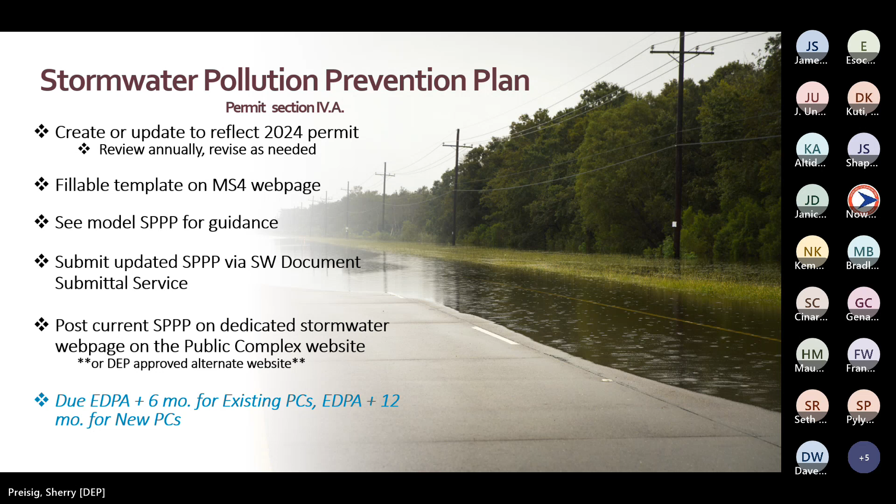Okay. Next up is public involvement and participation, including public notice. Now, this is something that all permittees have been required to do from the beginning of the MS4 program. And it's pretty simple. Just in order to comply with state and local laws regarding public notice, there are certain permit-related actions that need to be announced in a way that lets your community know when important stormwater decisions are being made. Public notices are typically done by posts in newspapers, social media, permittee websites, however you reach out to your people. You may also choose a direct email to disseminate information.

Okay. This is something a little bit new. In the current permit, the requirement's just to make sure that key stormwater materials are posted somewhere on your website. And the change here is that materials now need to be posted on a dedicated stormwater webpage. So everything will be located in one place, you click once, you'll see all your stormwater information so the public can access it. If your facility doesn't have its own website, that's no problem. Just contact your MS4 case manager.

I'm talking to the permittees. I don't know who else is on here, but the case managers can help determine an alternate website to post the materials. We do have an easy to fill template for your webpage administrator to use, and we also have staff in-house who can provide one-on-one assistance if anybody needs help with this. You will need to post your updated stormwater pollution prevention plan, all the regulatory mechanisms, which we'll talk about soon, your stormwater infrastructure map, and information related to the watershed improvement plan, like meeting dates and reports. And we will get into a little bit more detail about those things, but that's what's going to go on this dedicated webpage.

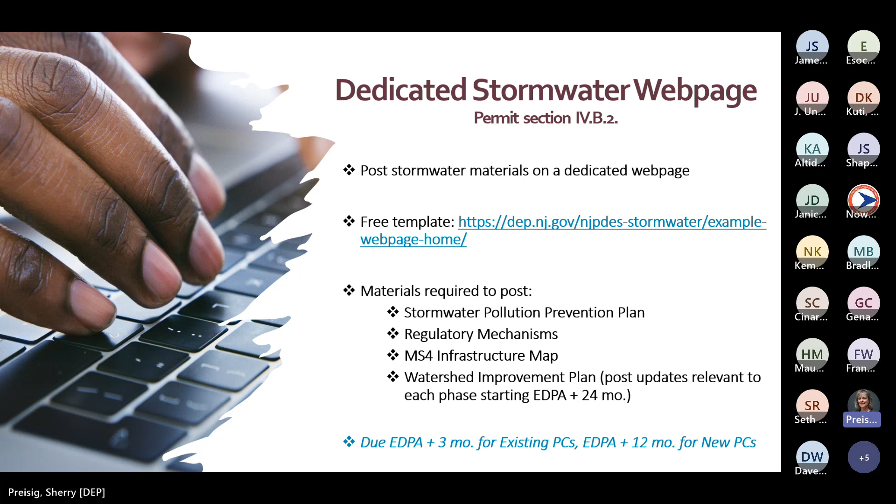All right. We're talking about local public education and outreach now, and as in previous permit iterations, colleges, universities, and military bases who have residents living on site need to arrange for a variety of education and outreach activities that total at least 12 points every year. For all the other permittees, this federal requirement is met when you conduct your annual training of employees at your public complex. The point system for education and outreach is a little detailed, so it's not in the body of the permit. It's in Attachment A of the permit.

We consolidated, this is something slightly new, it's just a minor modification. We consolidated the categories into 3 categories instead of 4. And we simplified the point system, we hope. So each activity is worth 3 points. It's real straightforward. Permittees will pick at least 4 activities. So 4 times 3 is 12, and you got your minimum right there. You're going to keep records of your activities and report them in your annual report.

And if you need ideas or some materials, we do have stuff posted on our MS4 webpage that you can use. For example, there's some flyers that are kind of template style where you download them, then just insert the name of your public complex with your contact information and send it out somehow with something maybe you were already going to mail, for example, like a newsletter. That's an easy 3 points right there. So you'll see Attachment A has a bunch of ideas there.

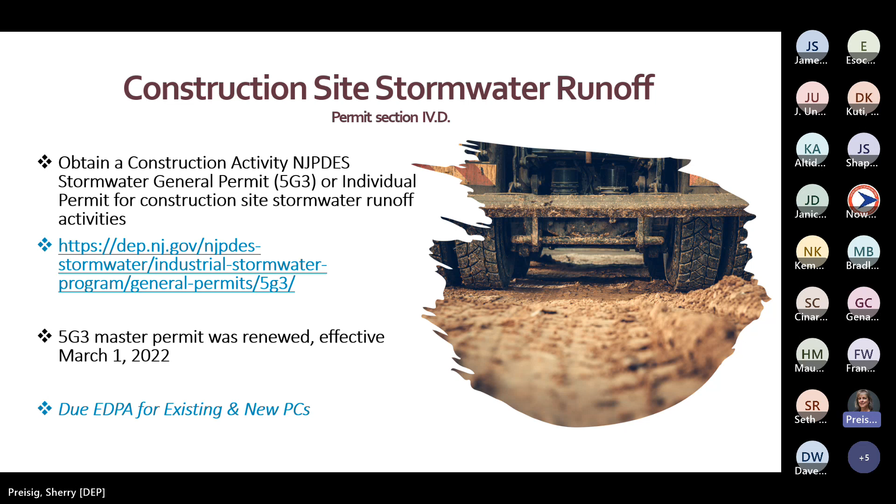Okay. Post-construction stormwater management in new development and redevelopment. This is another condition that's been required all along, and it highlights the requirements related to stormwater management designs for major development projects. Look at the permit for the full details, but in a nutshell, engineers who review and approve major development projects must ensure that the project design complies with the stormwater management rules at N.J.A.C. 7:8 and the department's BMP manual, and is then constructed according to the approved plans. Engineers who review and approve these projects should be different from the engineers who design the projects.

Reviewers must attend the department's stormwater management design review course. We call it SWMDR, and they get certified every 5 years to stay current. We will talk a little bit more about this when we get to the training section. If there are any amendments to the stormwater management rules that the department determines to be significant changes that might warrant training, your stormwater program coordinator, whoever that representative is for the public complex, will get an email notice from the department. The stormwater program coordinator may not be the engineer, so he or she needs to be familiar with this requirement and make sure the engineer is following all the right requirements.

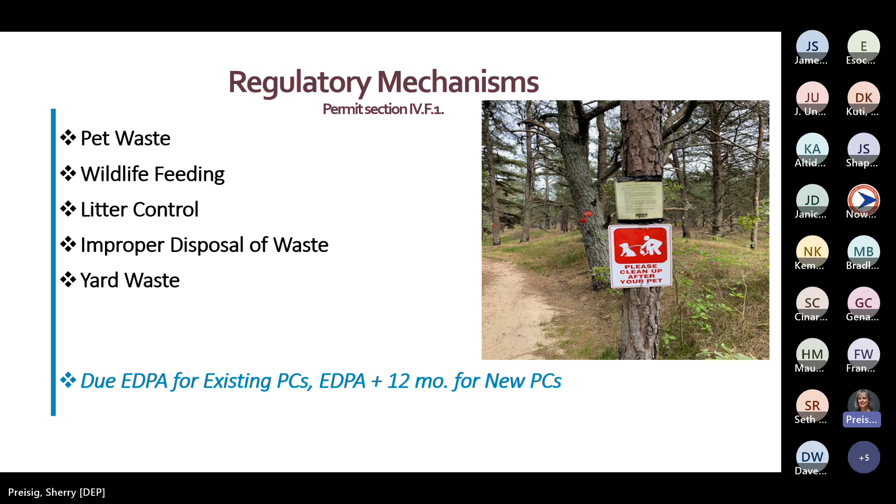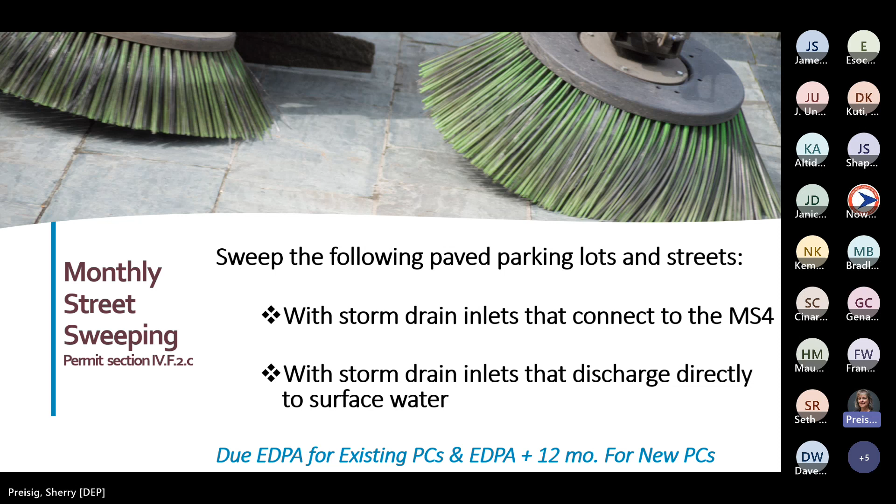Okay, the monthly street sweeping, there's really no change from previous permit iterations. As always, we require monthly sweeping of streets and parking areas that have storm drain inlets that direct stormwater into the MS4 or maybe discharge directly to the surface water. Okay.

Keep in mind, though, if you are installing a new storm drain inlet, you need to use an inlet structure that complies with the NJDEP design standard and grate spacing. We have that detail in attachment B of the permit. So if you're doing some new installations, you'll check that out and make sure you're using the right design. Another new condition here is for all new storm drain installations to include a corresponding catch basin or some other BMP designed for solids collection.

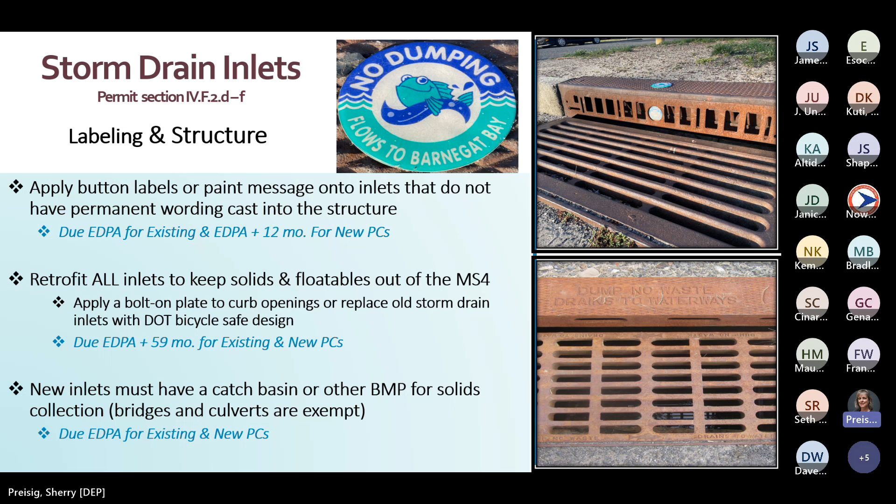Okay, let's talk about the difference now between storm drain inlets and catch basins, because now we're into the inspection, cleaning, and maintenance of these things. So storm drain inlets. The storm drain inlet part is the top grate that you can step on, and the vertical curbside opening. It's the stuff that you can see on the surface. If there's no curb, then you're not going to have the curbside opening, but you'll have a grate. So anything you can see on the surface is what we're referring to as the storm drain inlet.

Now the part that you can't see is the catch basin. That's below the surface. It's typically under the storm drain inlet, sometimes further down the pipe though. You should have already established what conditions warrant cleaning and maintenance of both your storm drain inlets and catch basins, because this has always been required in the public complex stormwater permit. So the requirement is to inspect all storm drain inlets and catch basins every year. Some of you don't have many at all, so this shouldn't be a big ask.

Storm drain inlet inspections can be done very simply by driving around to each inlet and checking for debris or clogs to keep the stormwater conveyance clear. And in most cases, it's just a quick sweep or a shovel job. That's all you need to do to clean them. Your stormwater pollution prevention plan should include a description of the conditions that warrant storm drain inlet cleaning and maintenance, and the procedures for how you want them to be done.

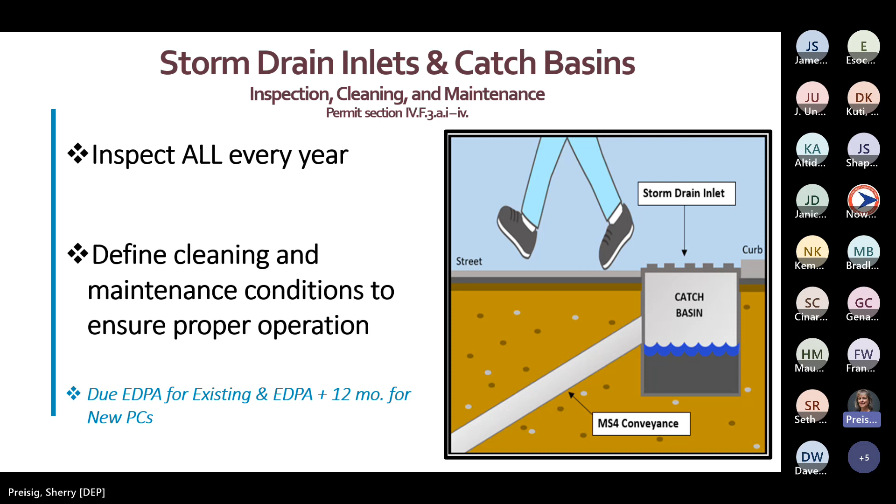Catch basin inspections, though, involve a little bit more work. The inspector needs to get out of the truck and inspect the inside of the grate and the hood of the inlet to determine whether or not it needs to be cleaned. When developing your catch basin inspection and cleaning program, check the manufacturer's recommendations for BMPs related to solids and floatables. They may have something to tell you, and the EPA also offers guidance. They have a guidance document on catch basin cleaning, and I believe they advise removal of materials when the sump pit gets about 40% full. So look into that as you're developing your program.

All right, MS4 conveyance inspection and cleaning. This requirement is aimed at conveyance systems like pipes or man-made ditches, things like that. There's a pretty good variety of things that constitute a conveyance system. These need to be inspected regularly and cleaned and maintained as needed to ensure proper function. Permittees must establish what conditions warrant cleaning and maintenance and create an inspection schedule that is tailored to their particular system and their resources.

We didn't specifically list conveyance features in previous permits, but it has always been required to maintain your stormwater facilities, anything that you own and operate. So you probably already have a log of your conveyance systems, and if you don't, you need to do this for the 2024 permit. You will see a new section in the 2024 update to the stormwater pollution prevention plan. That's what I'm going to call it SP3 going forward.

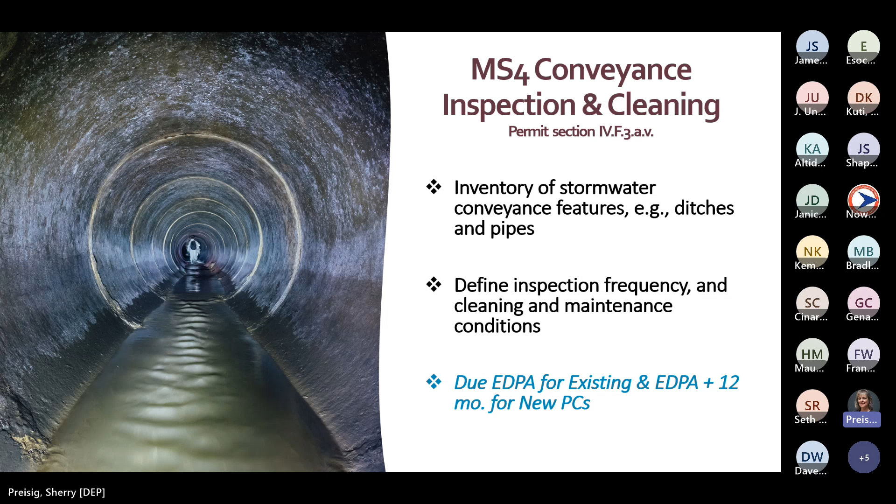Okay. All right, outfall inspections. Each outfall in your inventory needs to be inspected every year, at least once a year. Newly constructed or newly identified outfalls that weren't part of your previous inventory need to get inspected within 30 days of identification. The inspections will include checking the overall structure and integrity of the outfall, looking for clogging and instances of stream scouring and illicit discharge, which we're going to talk about a little bit more in the next 2 slides.

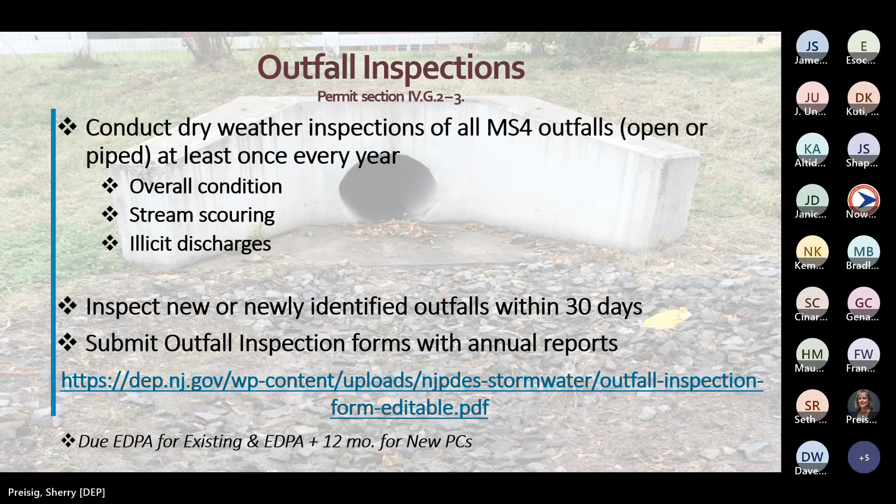Okay. So again, while you're out there looking at your outfalls, you're looking at the integrity and the condition of the outfall and checking for stream scouring. All reports of stream scouring, whether you find it during inspection or you hear about it and someone says you need to go take a look, any confirmed cases need to be remediated within 12 months of discovery unless a longer schedule is approved by the department.

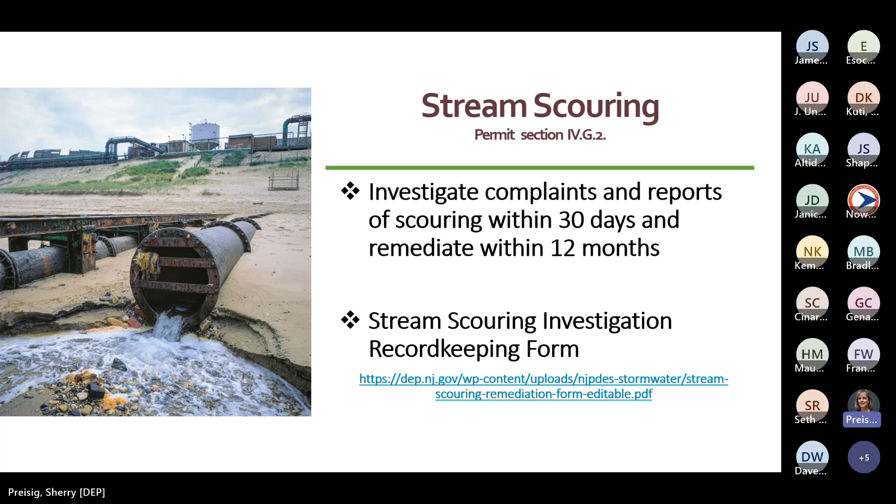Scouring might present as gouging out of the stream bank, undermining the outfall structure. It erodes soils, it clogs stream beds and ruins habitats. So when you're performing these inspections, just note if the soil is eroding away around the outfall and note if stabilization is necessary. The department has a form available to document stream scouring cases, should you need it. There's a link right there, and you'll find all these things on our MS4 webpage.

Okay. When performing investigations for illicit discharges, this is part of your annual checks, and also if someone says you need to go out there and look, you're going to look for instances of dry weather flow, which means a flow coming from the outfall 72 hours after the rain event, or evidence that an illicit discharge has occurred, such as the presence of sanitary waste items, like that. Additional indicators of an illicit discharge can include foam, turbidity, colored, or overly fragrant discharges.

All reports of illicit discharge must be inspected within 30 days, and confirmed cases need to be remediated within 12 months of discovery. The department has a form that's required to document each of these cases. So that's a special one. That's one that we need you to use if you have illicit discharge. And you will fill out the form and upload it with your annual report at the end of the year.

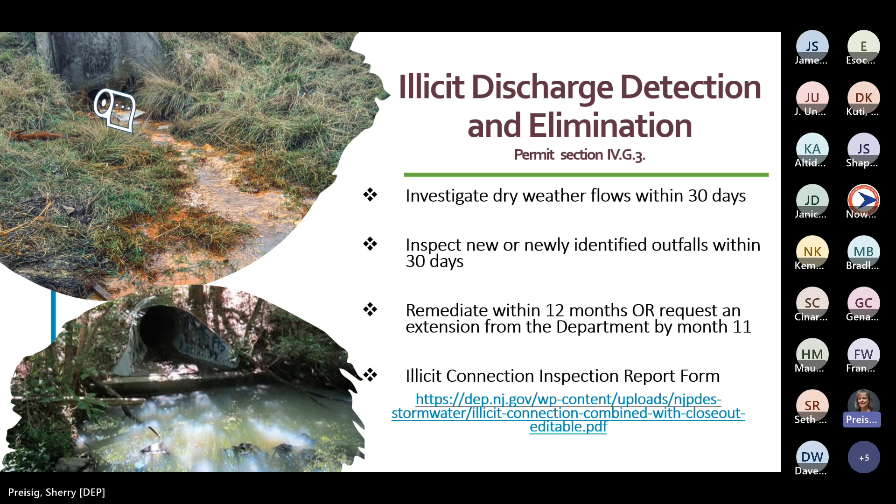Okay, this is a new condition and it serves as a sort of catch-all. Other stormwater infrastructure inspections is what we're calling it. So it refers to anything that's not already covered specifically in another permit condition. The permit includes specific requirements for storm drain inlets, catch basins, outfalls, and conveyance systems, which really make up most of the stormwater infrastructure out there. But this requirement is to cover any components that are not listed specifically, such as stormwater management basins, and manufactured treatment devices, and there may be some other things. Whatever you have that didn't get covered by another specific permit condition, this is how you're going to address them.

Your program and your SP3 must define the conditions that warrant cleaning and maintenance to allow proper function. Follow the approved maintenance plans, or if you don't have plans, you can create one by following the department's BMP manual or the department's other maintenance guidance. If there's no approved plan or the feature in question is not listed anywhere in the department's guidance, what you'll do is conduct inspections at least 4 times a year and after each heavy rainstorm exceeding 1 inch or more of total rainfall.

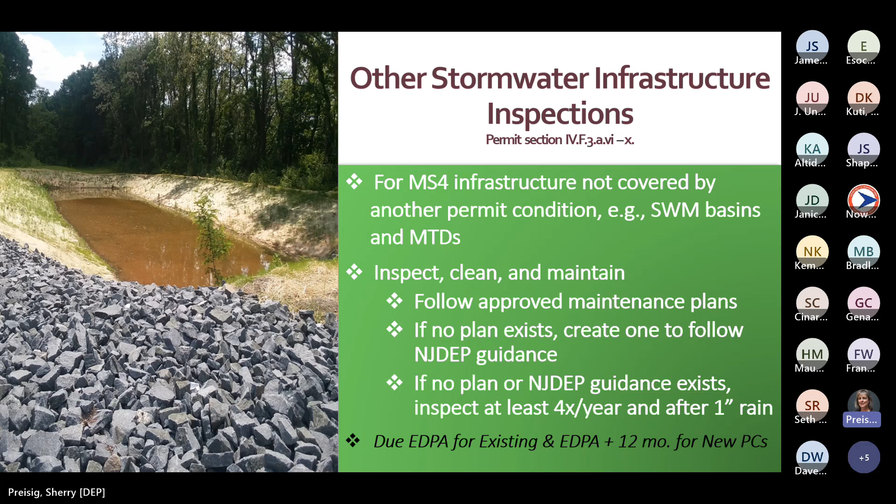Okay, herbicide management. The stormwater program coordinator needs to ensure that the staff are properly applying herbicides at your site. This means not applying herbicides on or adjacent to storm drain inlets or on steep slopes. Herbicides must only be applied to areas where it's unsafe to mow, and keep the spray around structures within a 2-foot radius, like telephone poles, that kind of stuff. Herbicides should not be applied along curb lines and unobstructed shoulders that contain unwanted vegetation, so it keeps herbicides from being washed into the waterways, and it'll minimize erosion and destabilization of stream banks.

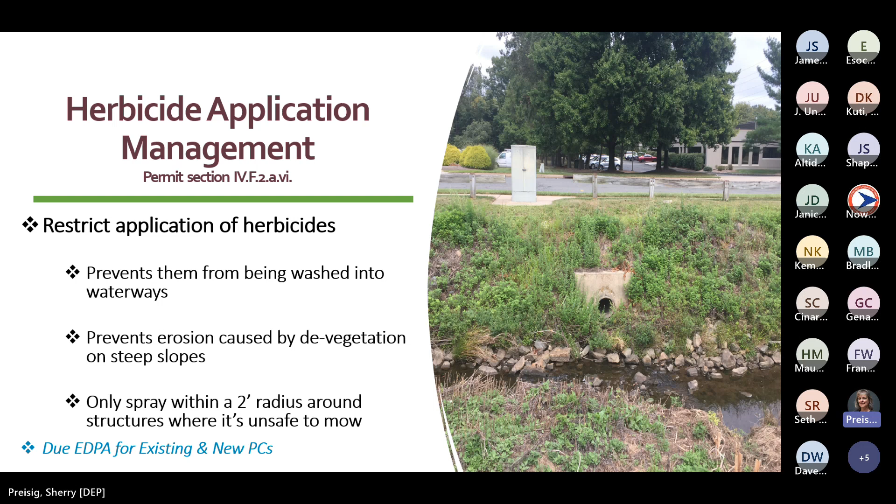Okay, so we'll talk about now excess de-icing material management. Road salt contributes to increased salinity in freshwater bodies. It causes degradation of the habitat necessary to support aquatic life, such as trout. So this requirement is aimed at cleaning up leftover piles of salt that sometimes get deposited when the driver starts up or stops the spreader when they're just sitting there. So these little salt piles need to be cleaned up within 72 hours of the storm as conditions allow. You may already do that, but this is going to be like a formal program that'll be part of your SP3.

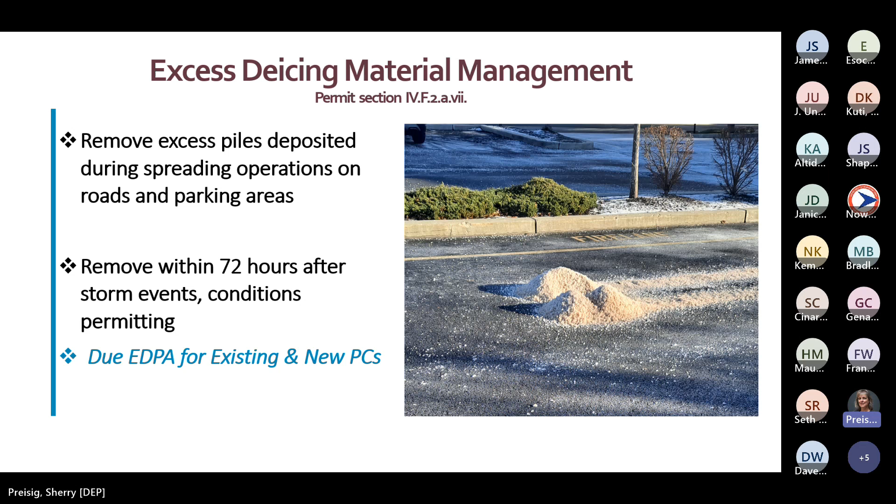Grass, leaves, and tree trimmings that find their way into the MS4 have the potential to clog the conveyance and increase nutrients and total suspended solids, or TSS, levels in the receiving waters, which may result in the harmful algal blooms I talked about earlier. This requirement is intended to ensure appropriate management of materials that are generated by your staff when they're mowing, trimming trees, or wood chipping on the public complex properties or on the side of the road,

maybe. Permittees need to ensure that nobody's intentionally blowing grass or leaves into the street or straight into the storm drain or ditches. We see a lot of bad habits when it comes to vegetative waste, so we created some new outreach materials with municipalities through the Tier A permit, and we'll be producing the same thing for public complexes. And we just want to spread the word with all of our MS4 permittees to try to get this under control.

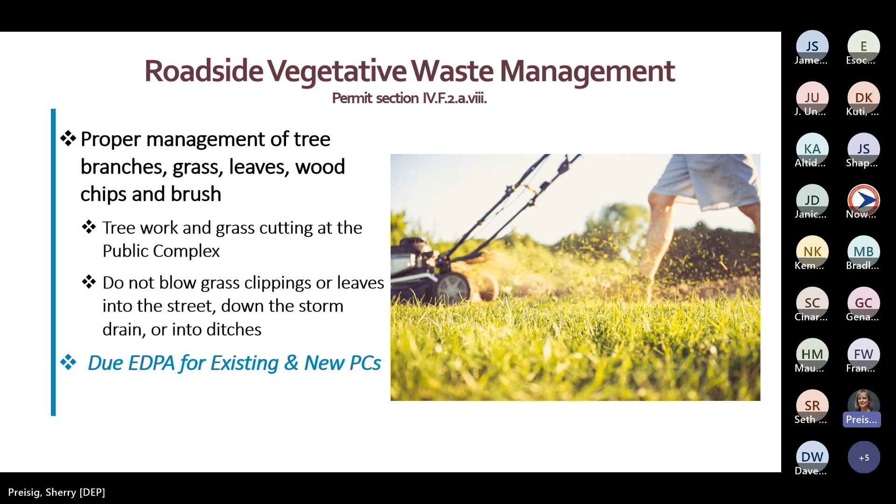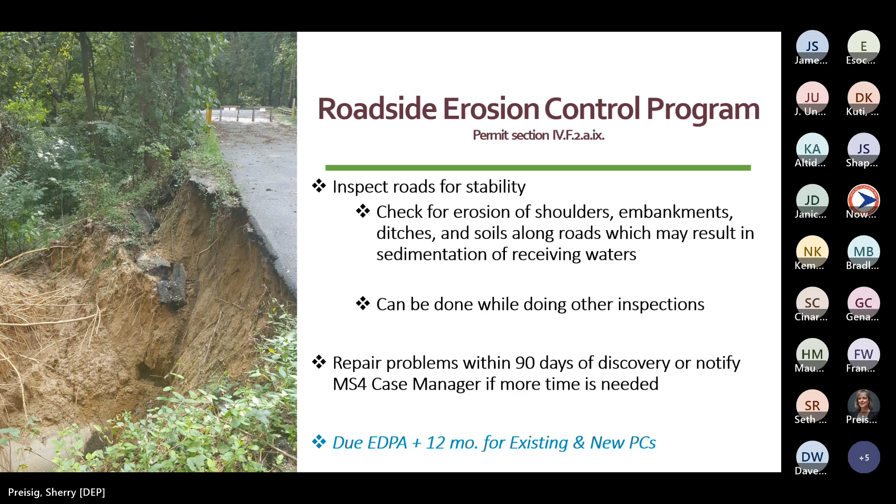So that's that one. And now I'm going to hand things over to Natalie. She's going to discuss the rest of the stuff, starting with maintenance yards and continue with all the other public complex permit requirements. Right now, I'm going to stop sharing and you can take over. Thanks, Sherry. All right.

Oh, it's going to make you start at the beginning. Okay.

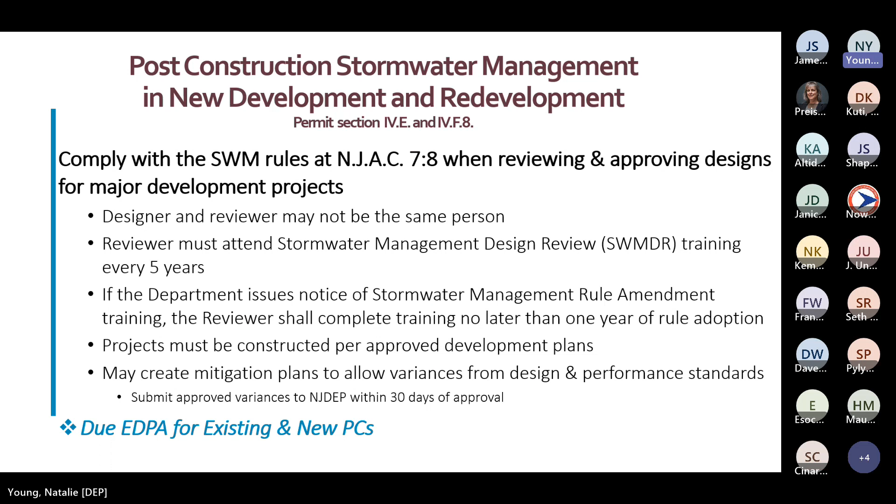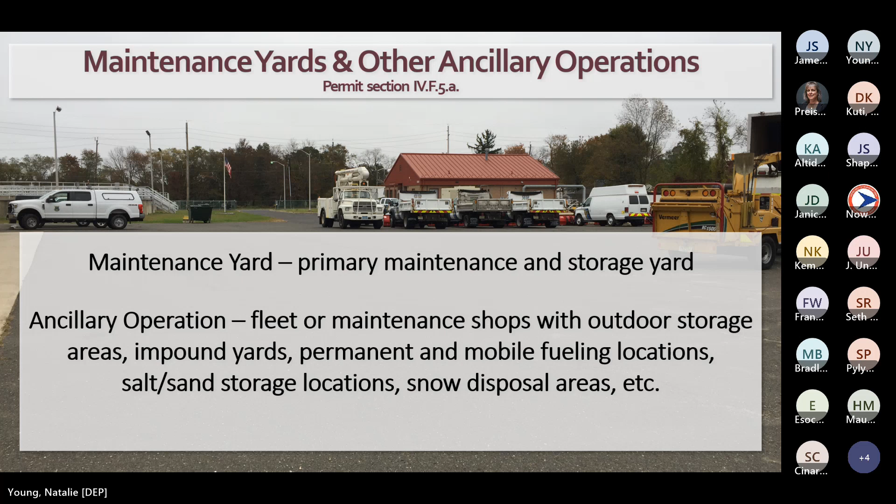These can also include sites where you allow students or families who live on the property to drop off trash, recycling, and yard waste. There are specific BMPs that must be implemented as follows. Site inspections: usually the DPW supervisor or designee will inspect each yard, note the conditions, and ensure that any necessary improvements are addressed and documented. Correct any non-compliance promptly and don't wait for your monthly inspections.

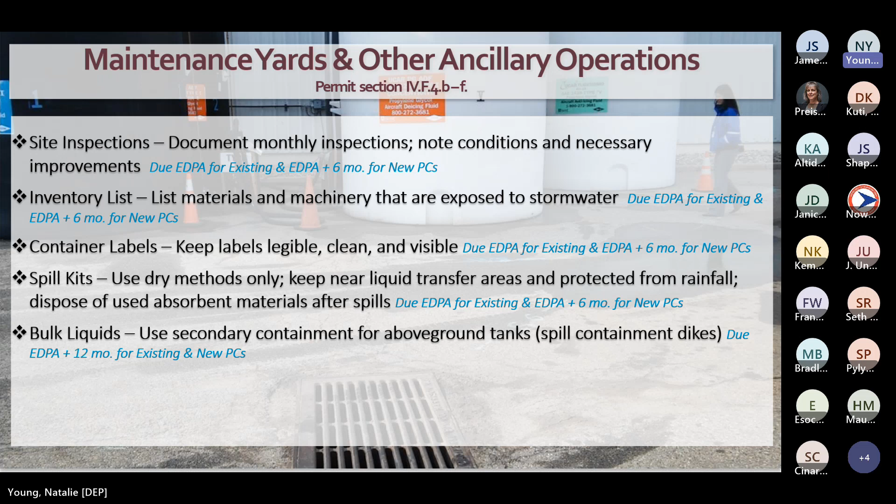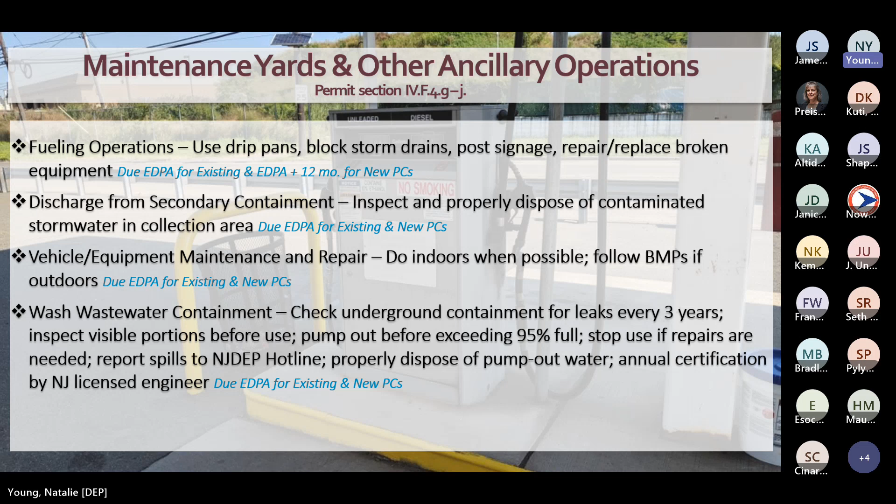Salt and other granular de-icing materials. These materials must be stored in a permanent structure in a way that minimizes exposure to rain, snow, and stormwater runoff. If you don't have a door on the structure, that's okay, but be sure to keep the materials from overflowing beyond the protection of the storage structure. Sweep up any tracked or spilled materials after loading and unloading. Keep in mind that there is a definition of permanent structure in the permit.

Aggregate material, wood chips, and finished leaf compost. Store these materials at least 50 feet from surface water bodies, storm sewer inlets, ditches, and other stormwater conveyance channels. Use three-sided storage bays, dikes, berms, hay bales, sandbags, or grading to minimize stormwater run-on and runoff. If you do composting, chipping, grinding, screening, or size reducing of wood waste or yard trimmings, you'll need an industrial stormwater permit for these activities. Finished materials may be stored indefinitely on the site.

Cold patch asphalt. This material must be stored indoors or stored on an impervious surface and covered with a waterproof material and contained to prevent materials from contaminating the stormwater. Street sweepings and storm sewer cleanouts. Keep these materials in a leak-proof container or stored on an impervious surface and covered with a waterproof material and contained to prevent materials from contaminating the stormwater. Materials may not be stored longer than 6 months, or you would need to apply for a solid waste permit.

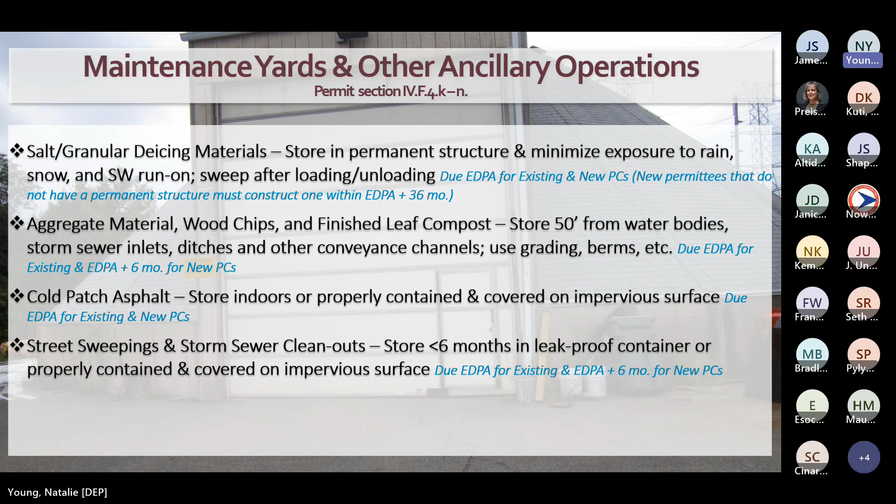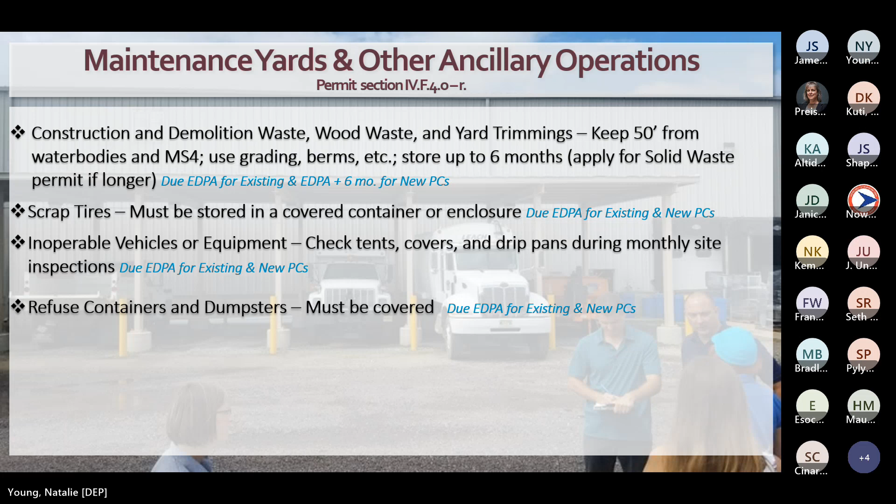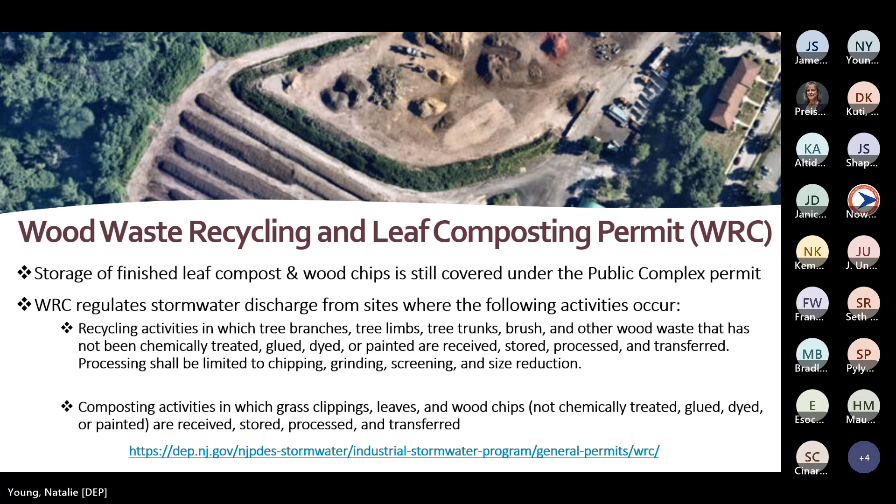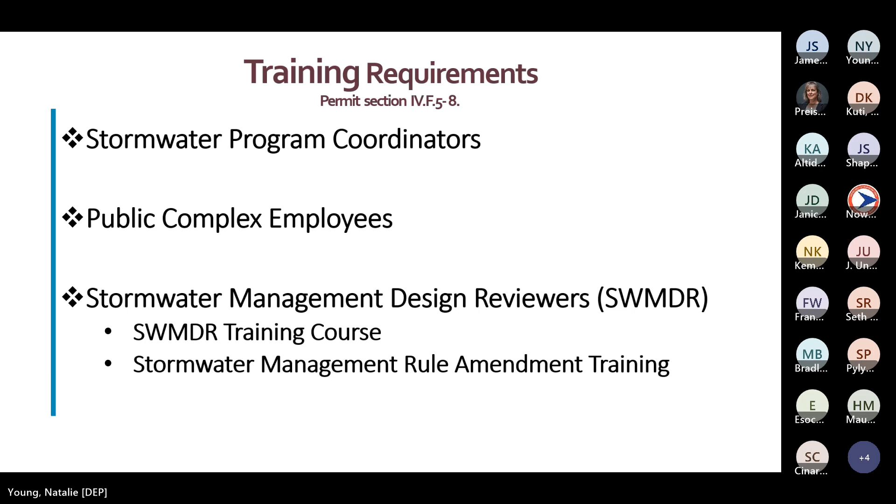Stormwater Program Coordinator Training. We developed this training to make sure that the permittee is interpreting and implementing the permit correctly and consistently. So all SPCs are required to attend this training once every permit cycle, so about every 5 years. During training sessions, we will be monitoring attendance and keeping records to make sure the SPC for every public complex has been trained. If SPCs change jobs or retire, someone at the public complex needs to let us know who the new SPC is within 30 days. The new SPC must attend the next available session, and we suggest they watch the recorded training session posted on the MS4 website just to hold them over.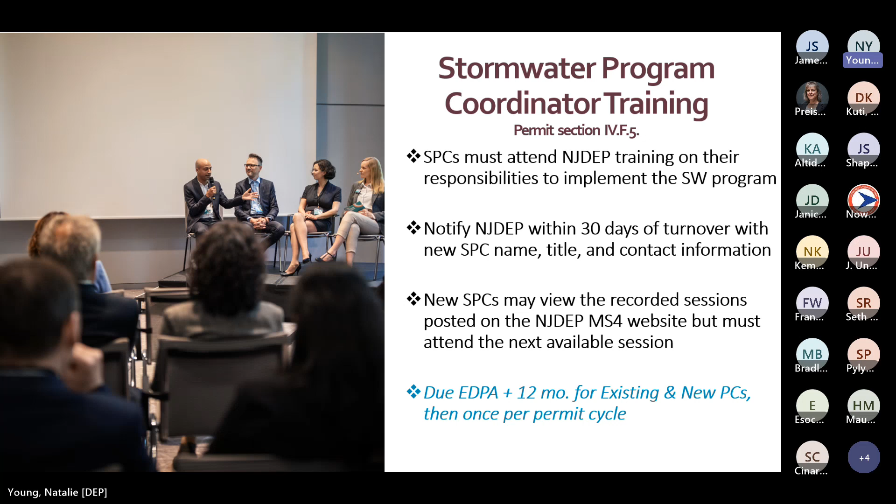Employee training. The SPC is responsible for conducting or coordinating annual training for their staff, including contractors, on stormwater-related job duties. New staff must receive training within 3 months of commencement of duties, then annually after that. Not everyone needs to be trained on every topic. Just make sure that people who are doing the work related to the topic are getting the appropriate training. The only topic that applies to everyone is review of the most current SP3.

We know that you don't have a training department, so discussion of these topics should be conducted each year, led by the most knowledgeable person that you have on that topic. This can be done in a group setting or one-on-one. It can be done in the field, in the office, or on the computer. The SPC is responsible for ensuring that all required training is held and all appropriate records are kept in accordance with the permit. The department has worked with the New Jersey Municipal Environmental Risk Management Fund to develop a set of 4 short videos. Topics include an overview of the MS4 permit, public education and outreach, SP3 development, and DPW operations.

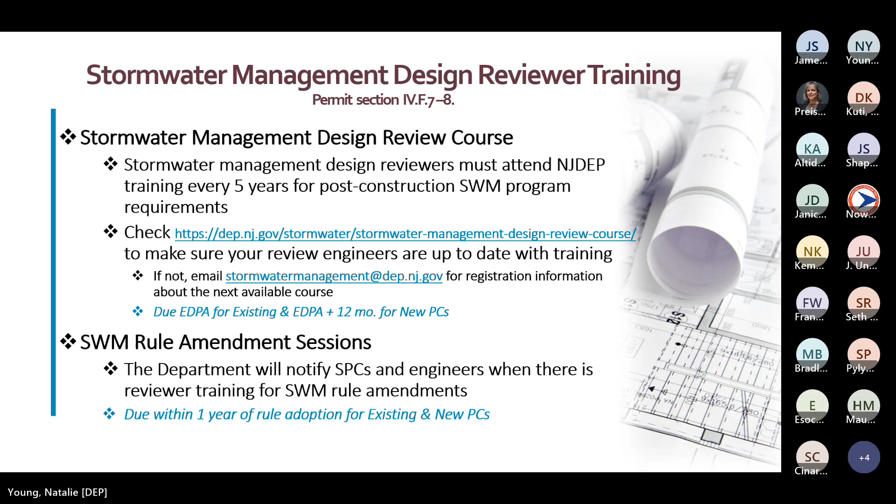MS4 mapping. If you have already been operating under the public complex permit, you should have already mapped most of these items. Permittees must submit the MS4 infrastructure map electronically to the department by January 1st, 2026. Electronically does not mean a PDF sent via email. Rather, it means submitting georeferenced shapefiles, geodatabases, or AutoCAD files.

The infrastructure map must be reviewed annually or more frequently as necessary and updated to include the location or attributes of any new or newly identified MS4 infrastructure. If you need help with this, please know that the department has a free mapping tool and can provide ArcGIS online licenses for free.

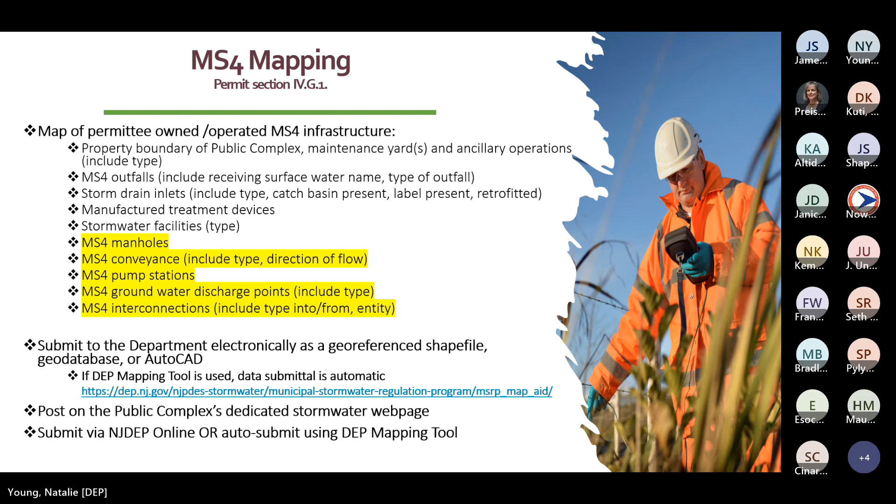The Watershed Improvement Plan. There are many water quality impairments and resulting total maximum daily loads, also known as TMDLs, that affect waters in every town across the state. And in case you are not familiar with TMDLs, they are reports that are developed for streams, lakes, or other surface water bodies that have violations of their water quality standards.

A TMDL is required to be developed to identify how to improve the water quality for the specific pollutants that are in violation in that water body, such as phosphorus, suspended solids, or fecal coliform. Some of these violations or impairments affect fish and aquatic biota, drinking water intakes that supply the water we drink, the rivers and coastal waters where many of us swim.

Every summer, more and more lakes are found to have harmful algal blooms as a result of poor water quality. Some of these waters have no other discharge into them other than stormwater runoff. The department is requiring that stormwater permittees develop a watershed improvement plan, what we call WIPs, to identify water quality and quantity problems affecting their waters and determine what improvements can be made to reduce their contribution.

The public complex permit will require that PCs communicate and collaborate with their municipalities to reduce the PC resource needs and ensure a more coordinated approach is taken. The WIPs may also be developed on a regional basis among towns managed by a watershed group, regional authority, etc. We do recognize that some sources of pollution and flooding are beyond your jurisdiction, such as farmland, municipal, or other public complex properties, but this exercise will help identify those sources.

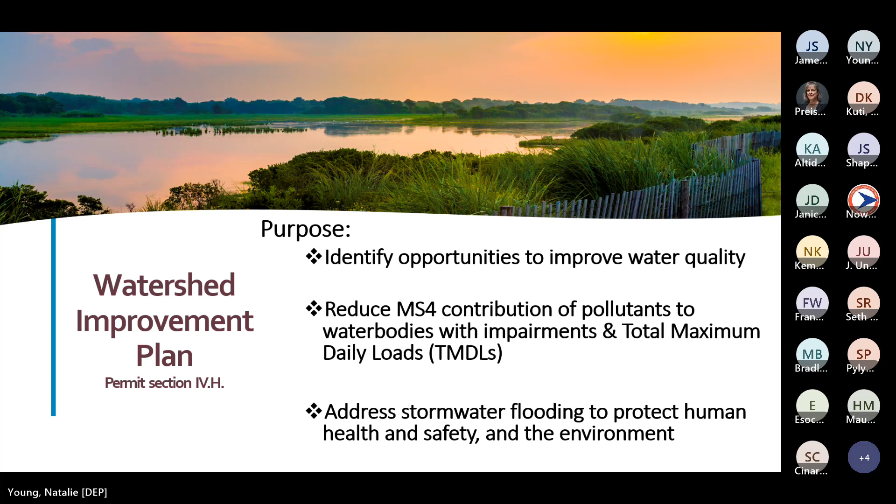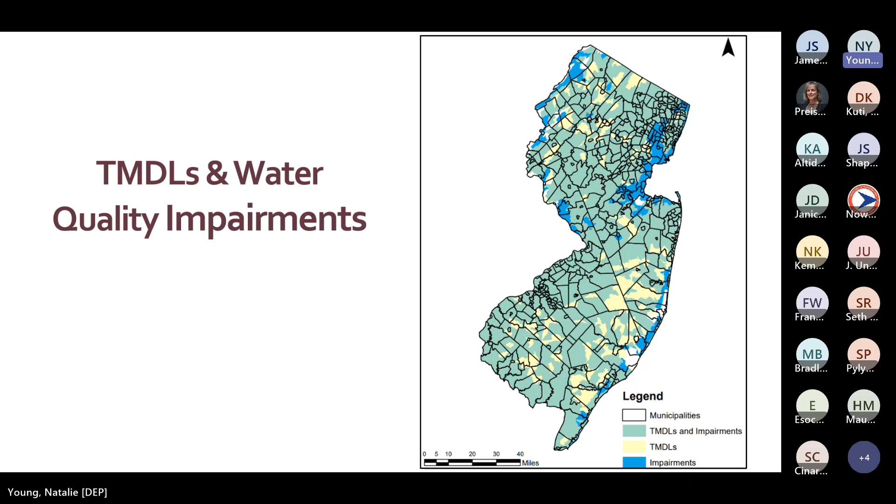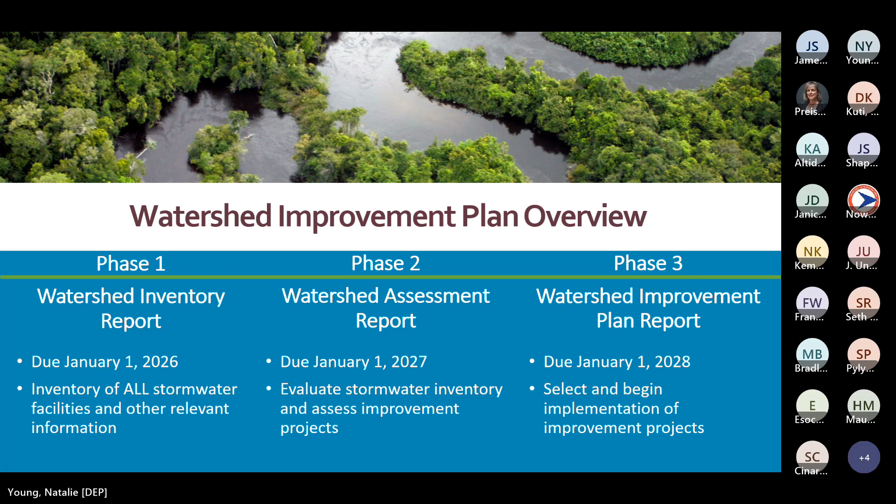The items with an asterisk represent the GIS layers that the department has available to the public. These layers are updated on different schedules throughout the year. You should combine your data with the department's data to create a complete picture of the discharges to segments of streams with specific impairments and TMDLs. It will be important for those preparing this phase of the plan to be familiar with the topography of the public complex properties.

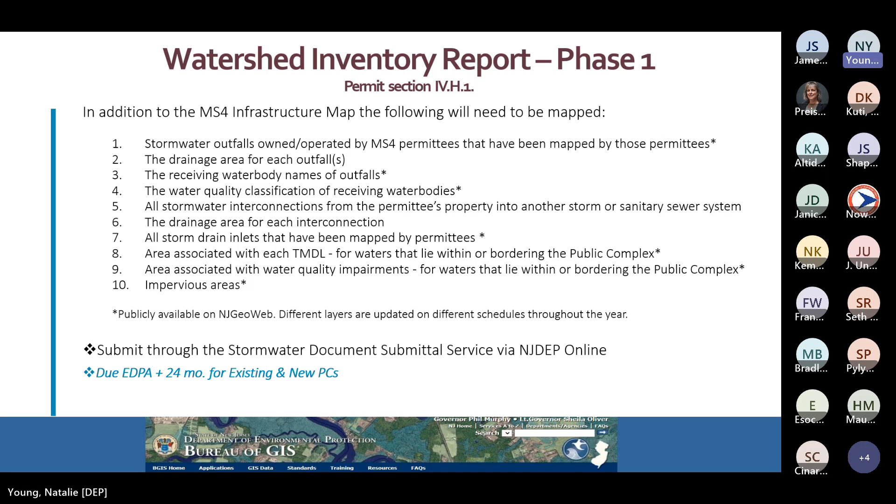The watershed assessment report, which is phase 2, is due by January 1st, 2027, which is 1 year after the watershed inventory report deadline. This will need to include an assessment of potential water quality improvement projects, an estimate of the reduction of pollutants, a summary of feedback from public sessions, an estimate of funding needs, and a tentative implementation schedule. The public information sessions can be set up collaboratively with any cooperative regional WIP that is formed for the area. The permittee shall post a watershed assessment report on its stormwater webpage and announce a 60-day public comment period.

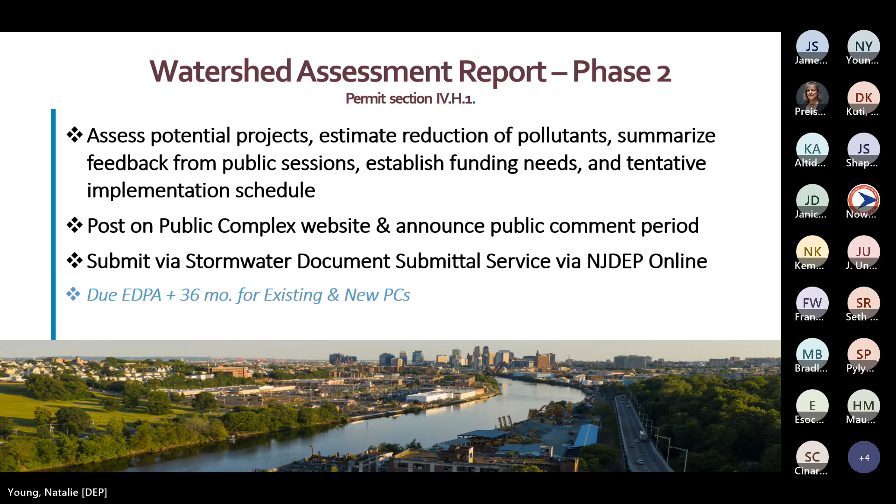The final phase, which is the Watershed Improvement Plan report, is due by January 1st, 2028. This report shall include a summary of proposed project locations, comments received from public information sessions, annual cost analysis for each project, coordination with other regulatory programs, final implementation schedule, schedule of public information sessions, and anticipated challenges beyond the jurisdiction of the permittee. The watershed improvement plan shall be updated when necessary based on the biennial review of revisions to the impairments of the permittee's water bodies based on the department's integrated report and newly adopted TMDLs.

The department recognizes that there will be broad differences in the scope of work that different public complexes will have to do for their WIPs, given the variety of properties. We will work with each permittee to help identify what can be done, and we will also provide a WIP report template for you to follow.

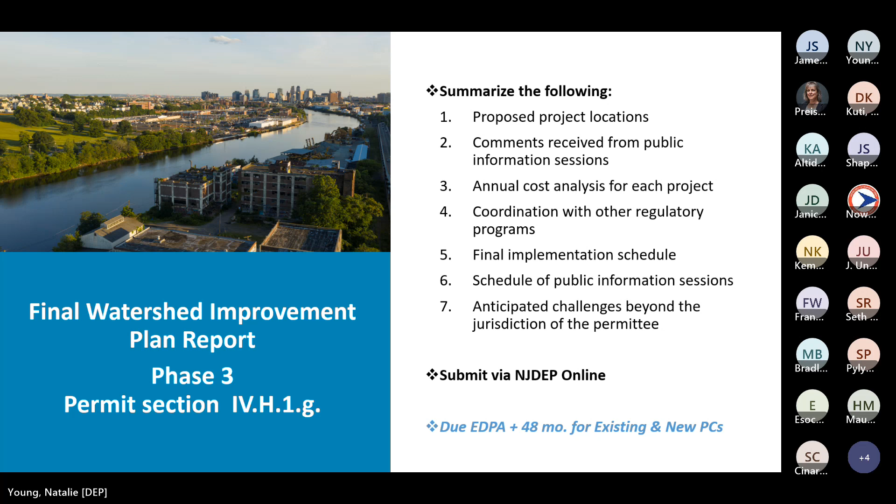The department will notify you if there are additional permit requirements that you need to adopt. This does not happen often. Such cases would require minor modifications to the master general permit and would require the permittee to meet either numeric effluent limitations or implement new or enhanced best management practices.

For optional measures, you are allowed to adopt and enforce other measures to your stormwater program that exceed the requirements in the permit, or you may have a problem that is unique to your area that relates to stormwater that you want to address.

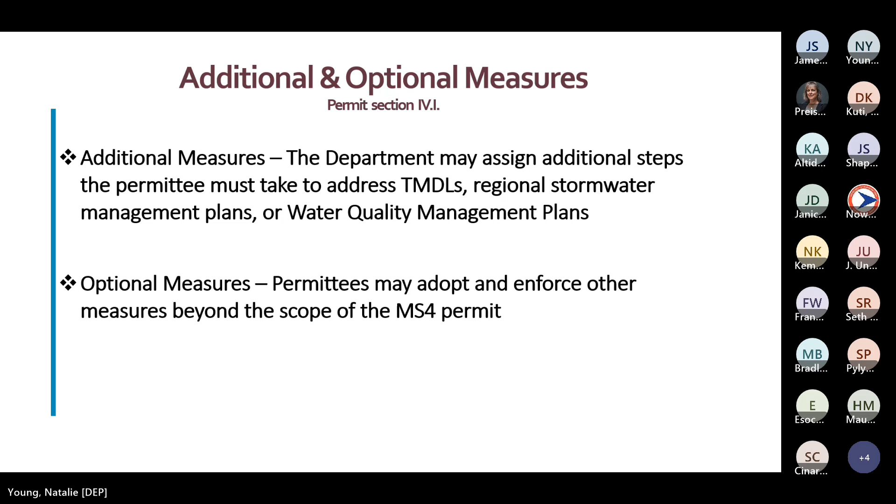Record keeping. So when DEP or EPA staff audit your public complex or conduct a site inspection, they will be looking at your records to demonstrate compliance with each permit condition. The permittee must ensure that these records are ready upon request. Be sure to keep copies of records or logs, inspections, repairs, and investigations related to permit compliance for at least 5 years.

Annual report. Every year between January 1st and May 1st, report on the previous calendar year by accessing the DEP online to submit the annual report. You must attach copies of your outfall inspection forms, and if you discover any cases of illicit connections within that reporting year, you are required to submit those illicit connection inspection reports as attachments to the

annual report as well. If this is your first time submitting an annual report and would like to see previous year's submissions, just contact your MS4 County case manager and they will provide whatever reports that you need.

Okay, permit attachments. Several conditions that were once included in permit attachments have now been added to the body of the permit, leaving only 2 remaining attachments in the renewal that provide guidelines to satisfy permit conditions, as noted on the slide. Attachment A will be a list of activities to choose from to satisfy the public education and outreach